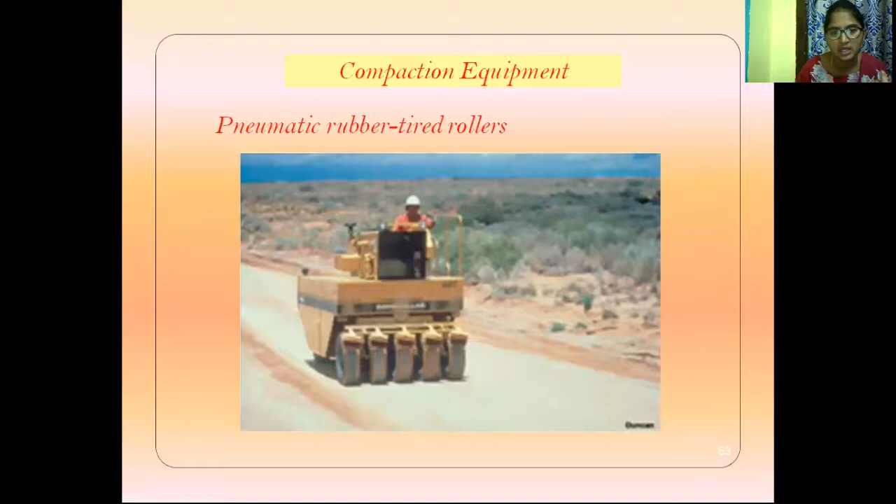Next, pneumatic rubber tyred rollers. Pneumatic rollers have closely spaced wheels, 4 to 6 in a row. The figure shows the 4 to 6 in a row. Compared to the smooth wheel roller, this is a very effective method. It is useful in clay soils. In pneumatic rollers, compaction is achieved by use of both pressure and kneading action.

These are suitable for all types of soils, but generally used for cohesive soils, that means cohesive and cohesionless soils, but they are most effectively used for cohesive soil. These are used for the construction of airfields, roadways, and earthen dams.

Next, sheep foot rollers: compaction is achieved by kneading action, which provides a comparatively stronger bond between layers of the soil mass. These are generally used for the construction of the core of dams. The contact pressure under the projections can range from 1400 to 7000 kilonewton per meter square.

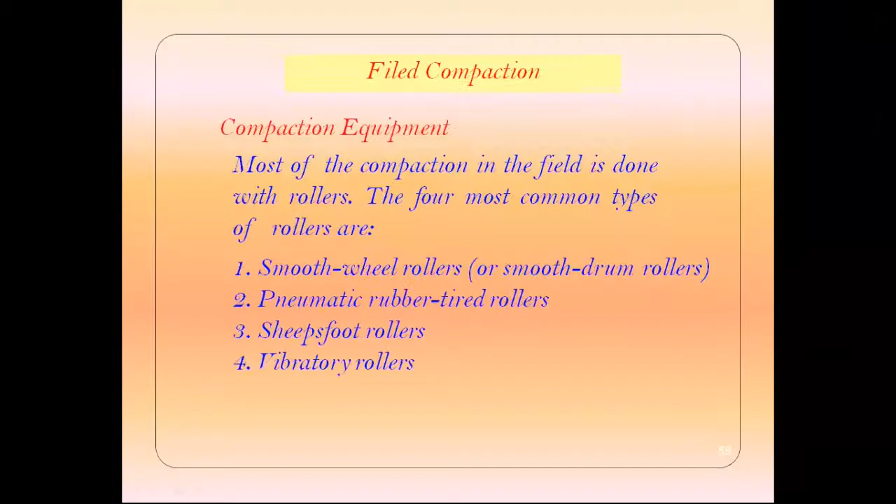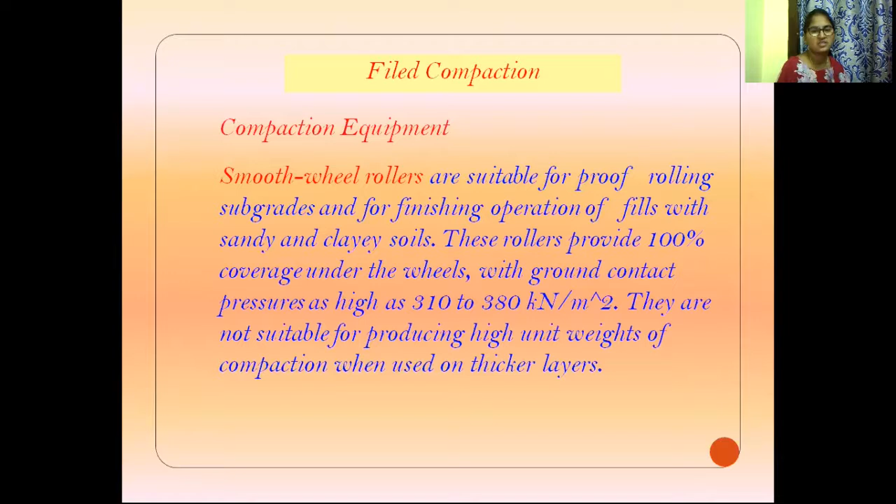So before construction of any building, any type of structure, earthen dams, buildings, water structures, compaction will be done. Field compaction equipment includes smooth wheel rollers, pneumatic rollers, sheep foot rollers, vibratory rollers. Smooth wheel rollers are generally used for sandy and clayey soils, consist of one front drum or two drums, and are effectively used for gravel, sand and silt soils.

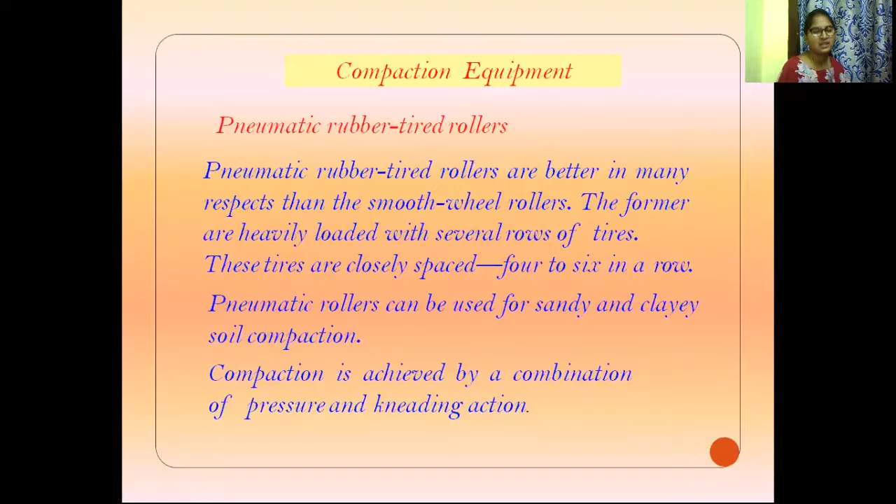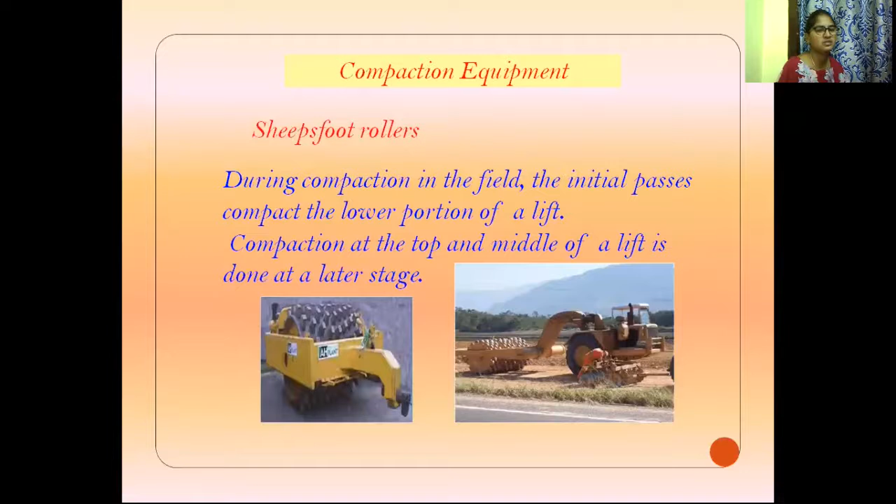Pneumatic rollers are more effective than smooth wheel rollers. These pneumatic rollers have 4 to 6 wheels in a row and are effectively used for compacting sandy and clayey soils. This is the pneumatic roller. Sheep foot rollers are used for large projects; the projections may range from 25 to 85 centimeters square. The figure shows the sheep foot rollers.

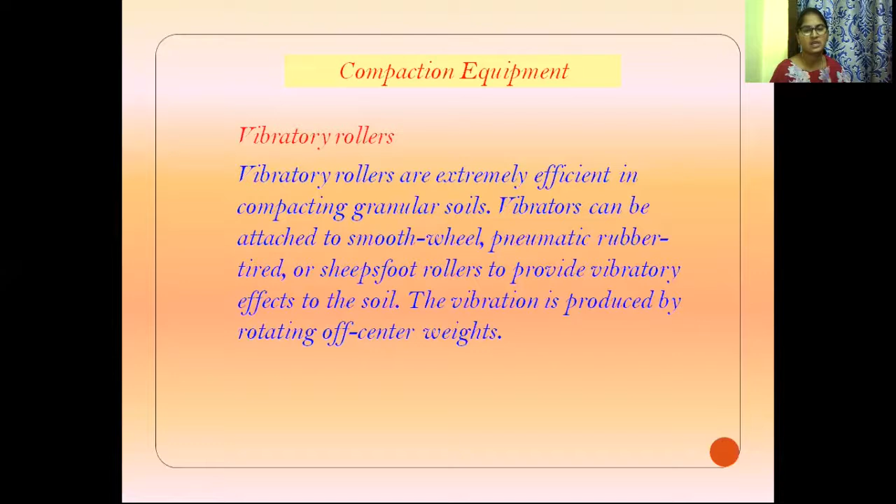Vibratory rollers are used for compacting granular soils. Vibrators can be attached to smooth wheel, pneumatic rubber and sheep foot rollers. So this is a brief introduction about compaction equipment for laboratory tests and field tests. Compaction is very important while constructing any structure.